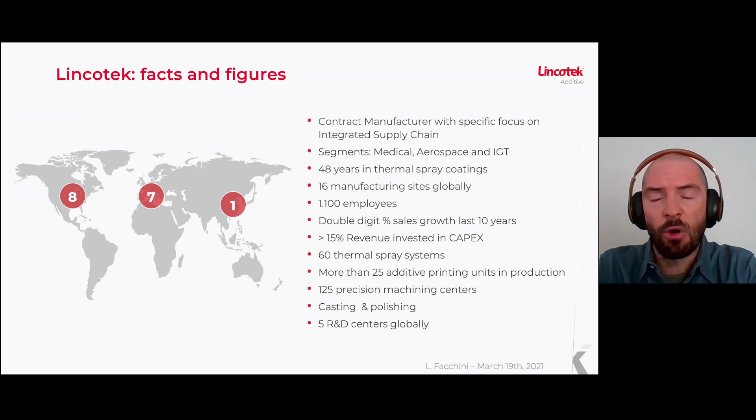Lincotek is a contract manufacturer focused on integrated supply chain. We started with thermal spray coatings about 50 years ago in Italy. Today we have more than 1,100 employees and 16 manufacturing sites globally. Now, in addition to thermal spray, we offer design, casting and polishing, machining, and additive manufacturing.

Lincotek Group operates in medical, aerospace, and IGT segments. We produce and commercialize our own plasma spray equipment as well. And in the last 15 years, we gained extensive experience in additive manufacturing.

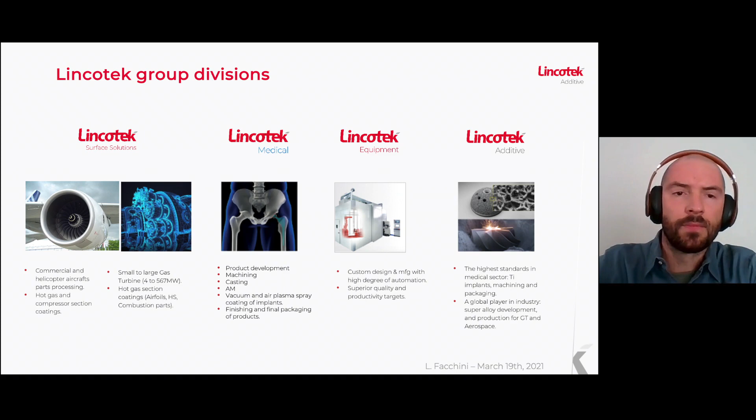In fact, we invested a lot in research and development, and we still invest. We have engineers working on it and also working on validations and co-design. And we are able to handle different materials used in medical applications, such as titanium 6-4 and cobalt chrome.

Just this month, we have helped the OEMs with 2 products through the FDA. These involve product level validations to generate data and reports to satisfy FDA requirements as laid out in guidance documents for AM. At the same time, we know very well what serial production is and how to manage it.

Today, we have 25 AM machines globally, making in excess of 110,000 implants per year, 70% of which is for large joints. To give you an idea of the scale of our AM operation, we consumed in excess of 14 tons of titanium powder for AM.

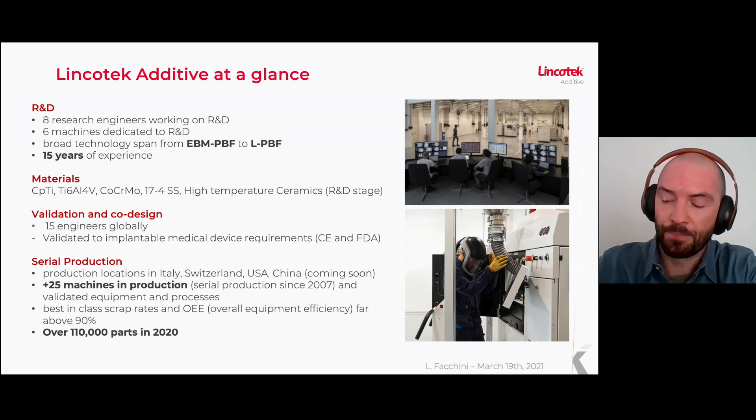In approaching additive manufacturing production, you have to keep in mind that it's not just about technology, since the process itself is just a piece of a manufacturing route.

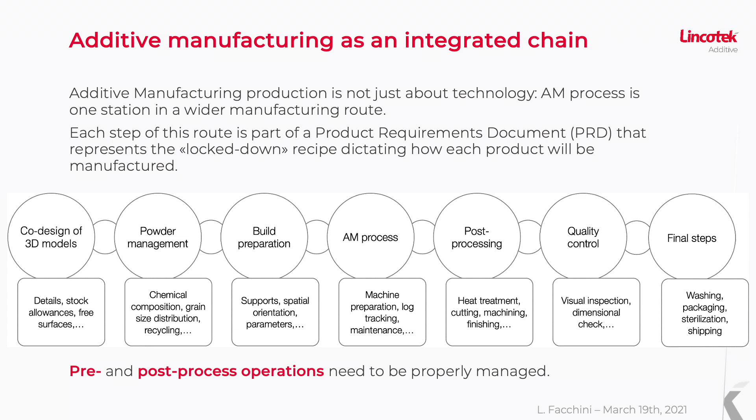Co-design, powder management, and build preparation are basic pre-process operations, and they are as essential as post-process operations like heat treatment or machining. And of course, parts cannot leave the plant if they didn't pass quality controls, and if they are not properly packed. It can seem trivial, but it's not.

Supply chain of AM is perhaps more complicated than that which deals with raw materials. Most facilities accept raw materials based on chain of custody, but with AM, it's mandatory to source from dependable suppliers who respect ASTM standards and are dedicated to quality.

In addition, at least at Lincotek, no powder batch is allowed to go on the shop floor unless AM parts made using that batch satisfy ASTM standard requirements. In the next slides, I will explain how we AM engineers manage the supply chain aspect of AM from an engineering perspective, ensuring quality and reliability.

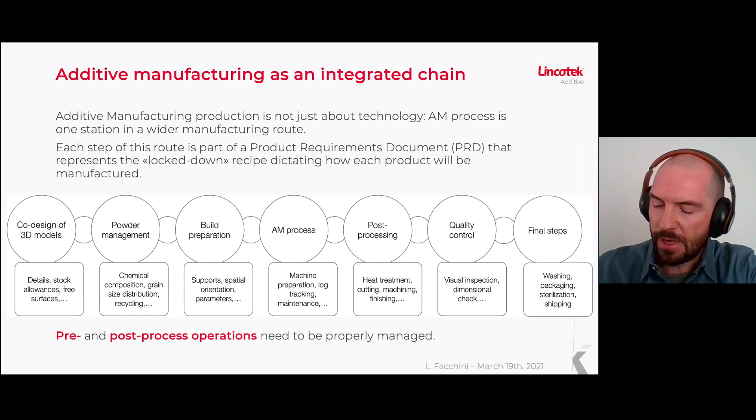Creating net-shape lattice structure is for sure one of the best features of additive manufacturing. In 2017, FDA stated that about 68% of AM devices has a complex porous structure.

About this, in Lincotek, we deal with different 3D CAD files and dedicated software, and we have our own device master file. This is especially useful for US customers.

Anyway, AM has strong points as well as limitations, as any other production technology. And the experience, in this case, plays a basic role in managing the limitations and exalting the strong points.

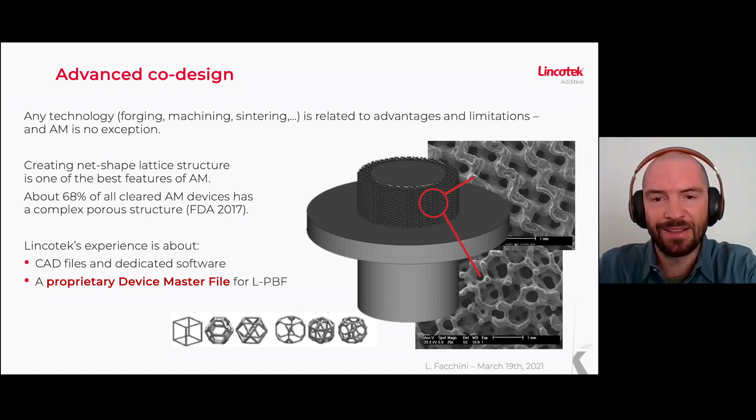We know that design shall take into account several details and aspects. For instance, it's important to clearly know which surface will be finished or tooled and which not, and the spatial orientation of the parts, as well as the placing of supports, will be related to these aspects. As an example, here I have represented a possible 3D geometry.

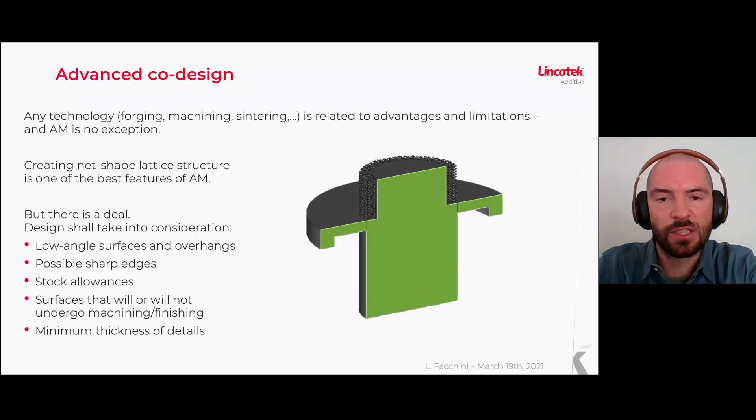Such geometry has many illustrative attributes. For instance, sharp edges can be critical as points of stress intensification and crack nucleation. And generally, in powder bed fusion, low-angle surfaces are not self-supporting, so extra supports are needed.

The minimum obtainable size is related to the beam melting pool, so there's a limitation to the minimum reachable thickness of thin geometries. But there are many other examples. For instance, the orientation and the size of through holes are crucial, since both support removal and powder evacuation can be hard to do, and so on.

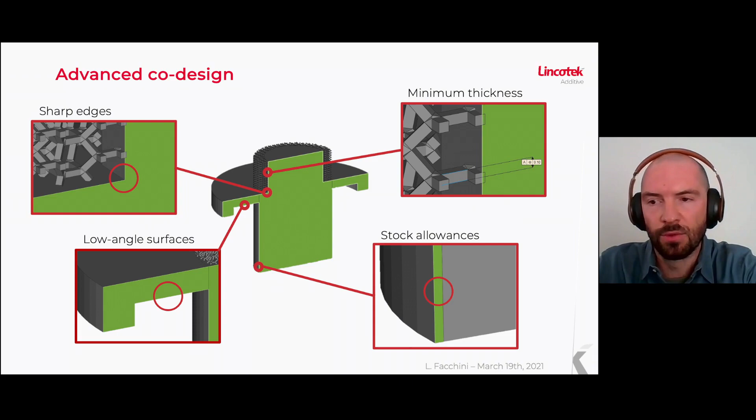I am making these points to illustrate the scrutiny we put the customer's CAD files through. Our ultimate goal is to get this part through notified bodies, and this analysis helps ensure that these parts will meet performance criteria and have a stronger chance of approval for clinical use.

Of course, the raw material is a determinant for the success of the build and also for the properties of the final part. The grain size distribution of the powder, its morphology, and its chemical composition are some of the features that need to be optimized.

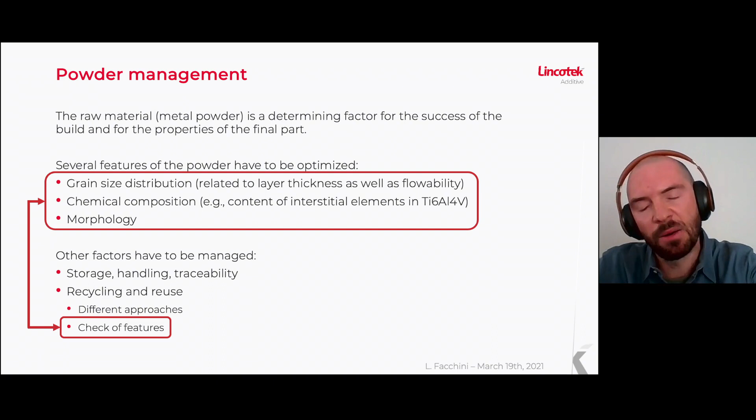But many other procedures, such as powder storage and handling and its recycling, have to be properly managed. For example, our master file discusses the change in mechanical properties as the number of reuses increases.

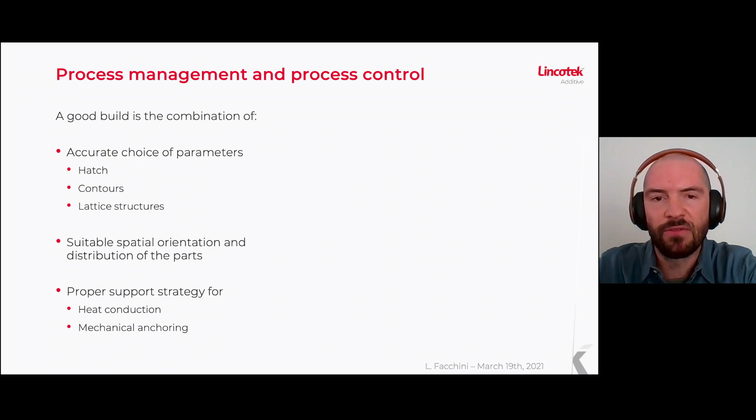Well, a good build is the combination of different aspects. First of all, any item calls for a specific parameter set. So the beam power, the scan speed, the scan path, the focusing of the beam will change if you're melting a solid block instead of a lattice structure.

And these parameters will be different at the core of the part and on the contours.

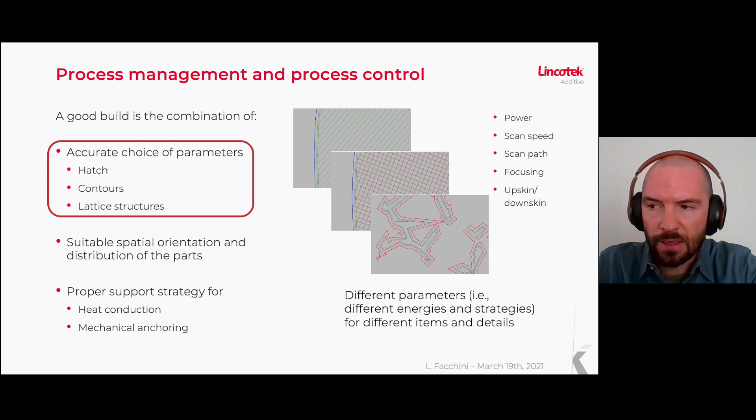The spatial orientation of the parts and their distribution on the building plate can affect the thermal history of the build and the mechanical solicitation of the parts during the process. And this will impact the final surface quality, the residual stresses, and the dimensional consistency.

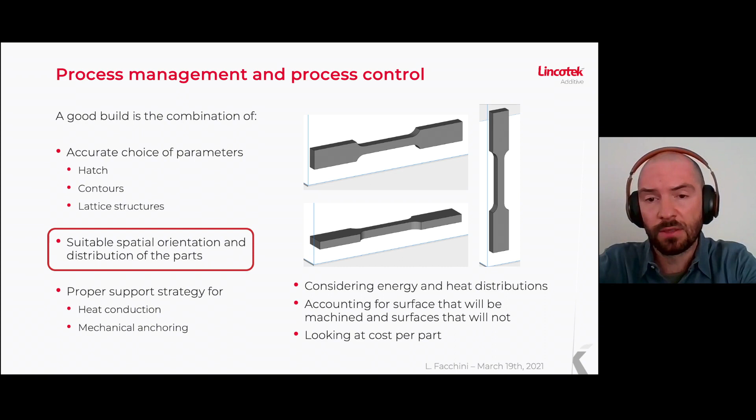The orientation of the part also affects the need for supports. Since supports help in mechanical anchoring and in heat conduction, but at the same time, their application is strictly related to the orientation of the part, and of course, their use will also determine the surface quality and roughness of the as-built part.

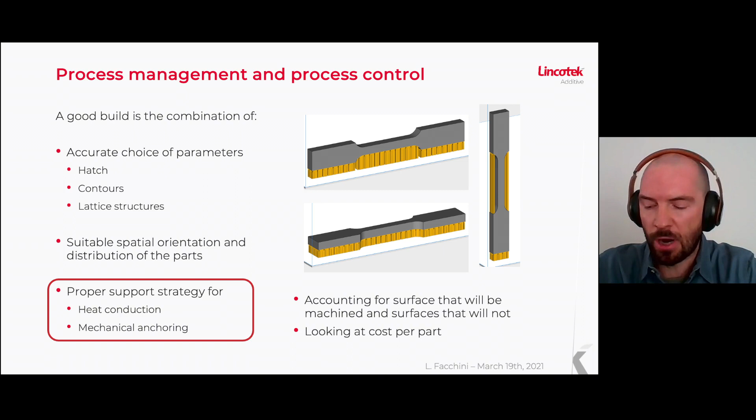Even if the supplier and the model are the same, each machine is different from the others. So each machine can produce statistically equivalent parts, but only if process parameters and offsets are properly adjusted. This requires a lot of expertise and, of course, a lot of work on tuning.

Our master file talks about equivalence of the output of our machines. This huge work we have done over many years gives comfort to OEMs that at least at Lincotek, they are getting an equivalent supply chain regardless of which machine is being used.

And just to clarify, we are not saying that each supplier and each technology are equivalent. They aren't. That's wrong. We are saying that we maintain our production line where these machines become equivalent in output.

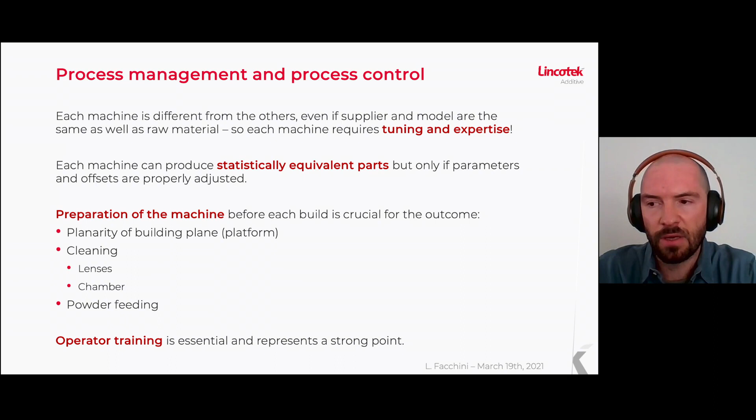It must be said that also the preparation of the machine before each build is critical for the process. Among other things, the planarity of the building plane, the cleaning, and good powder feeding are crucial for the outcome, and so operator training is essential.

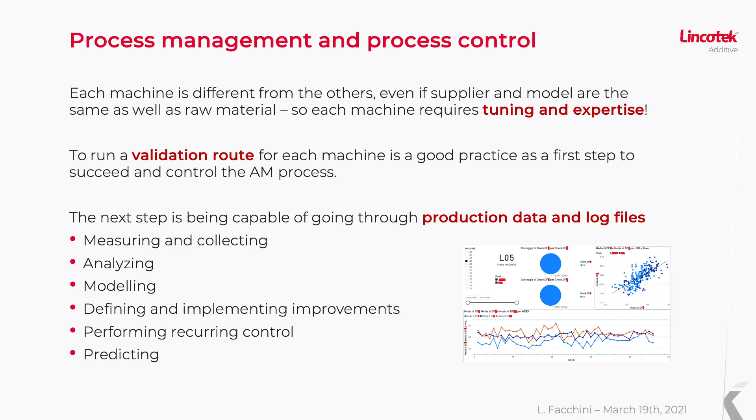Well, let's talk about validation. Validation is a first step to control and dominate the AM process. But the next step is represented by the study of production data and log files that have to be collected and analyzed for modeling, implementing improvements, for performing controls, and also for predicting events. So big data helps us in running our process.

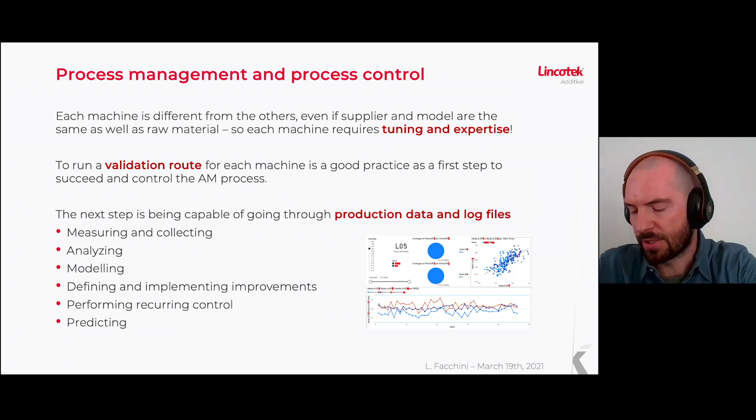Talking about validation, today FDA and international standards organizations provide recommendations for carrying out validations, and we deal with this. Validation of our processes goes through some steps. During the IQ, the installation of the process equipment is checked. Then during OQ, it shall verify the equipment operations and demonstrate the effectiveness of the process.

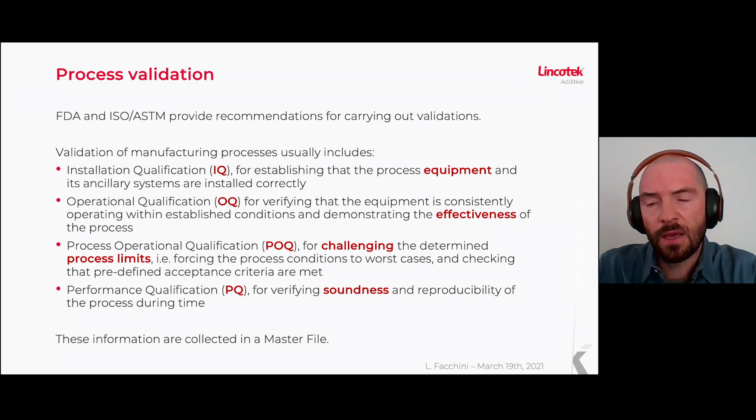POQ is carried out to challenge the determined process limits. Then finally, PQ shall verify the soundness and the reproducibility of the process. And all this information is collected into a master file.

Lincotek adopts a two-level approach. At the process level, we verify the effectiveness of the process itself, the compliance with the standard requirements, and so on. Access to this proprietary information is possibly authorized on the basis of agreements with the OEM. The second level is a device level in which the operational qualification and the performance qualification are drafted by Lincotek and reviewed by the OEM and directly pertain to the product. This is very common with our US-based customers, and this approach has helped us in addressing FDA questions.

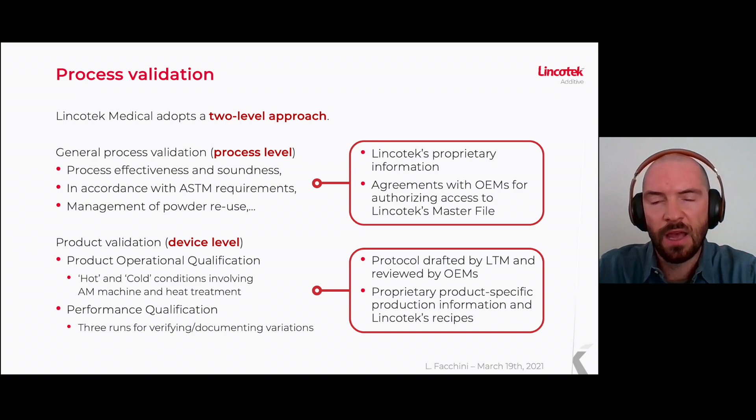Jumping back to the chain, post-processing is as important as pre-process operations. Heat treatment is usually performed for stabilizing the microstructure and removing the residual stress, and it's critical for the final properties of the material. It works fine for this, but at the same time can lower the yield strength of the material, and this has to be dealt with.

Many parameters and features have to be defined and managed, such as temperature and soaking time, the vacuum level for high vacuum treatments, the pressure in case of hot isostatic pressing. The message is heating technology is complex and tricky and requires careful preventive maintenance and a lot of expertise.

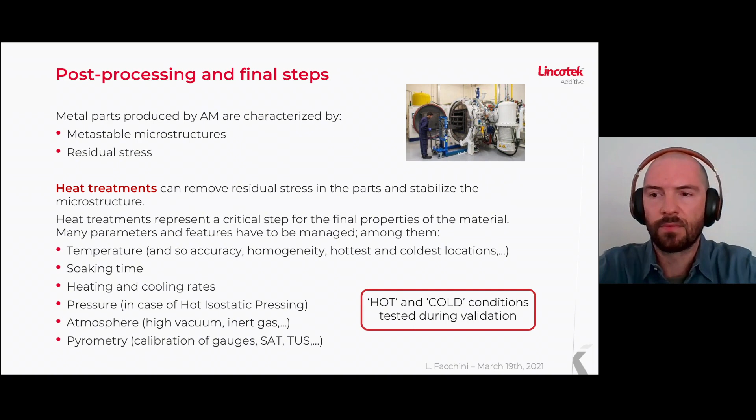Since the parts are welded to the building platform after the process, they have to be detached. EDM wire cutting or band saw can be used depending on the need of precision instead of speed. However, when possible, an accurate design of supports can make the detachment possible even without cutting.

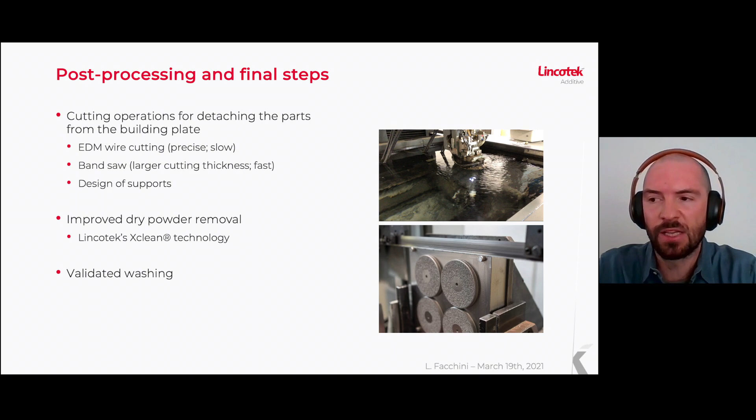Then after cutting, the parts are ready for going through Xclean, that's the Lincotek's validated process developed to clean from the residual metallic powder in completely dry conditions.

Here we have illustrated some tibial and femoral components of knee prosthesis produced by additive manufacturing and then tooled and polished. Actually, Lincotek offers the combination of these operations in Europe as well as in the US. Expertise in additive manufacturing together with skills in machining result in an improved mindful design.

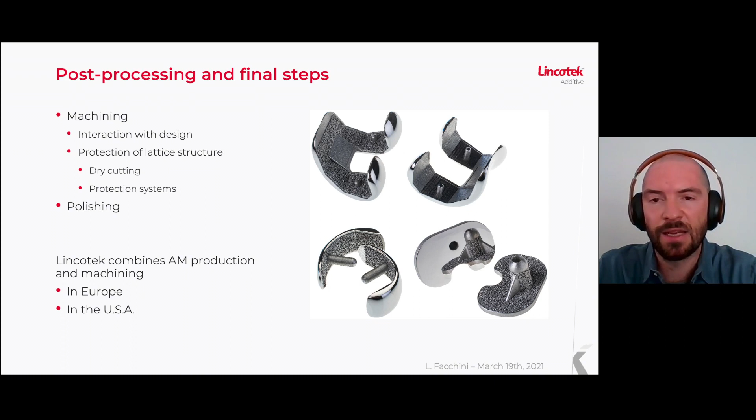Moreover, since we are aware of the importance of keeping AM lattice structure clean and free of contaminants, we gained experience in dry cutting of titanium 6-4 and cobalt chrome, and we also studied specific systems for protecting and shielding the net from lubricant.

Our operators are trained and skilled for manual finishing. This impacts on several further operations depending on surface quality, such as laser marking.

We already talked about the continuous control of the process by managing big data. Final controls, such as visual inspections, dimensional checks, and mechanical testing on coupons, feed this collection of data, as well as they determine the quality of our parts.

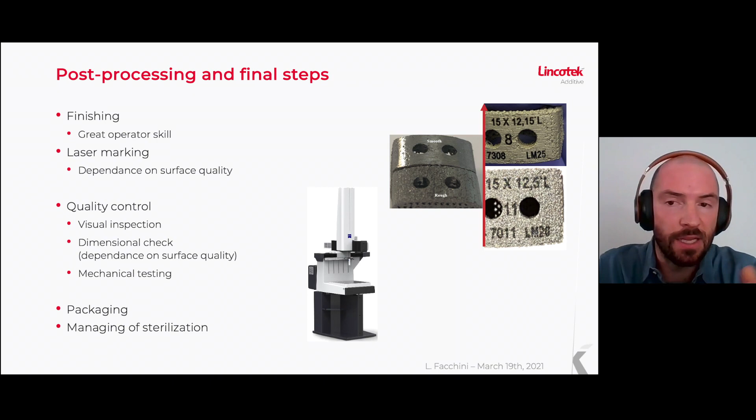After the quality assurance says yes, parts are ready for packaging, sterilization if required, and then for shipping.

So in conclusion, we have seen that additive manufacturing production is not just about technology. AM can print complex 3D shapes, but there are some limitations, and co-design becomes crucial for overcoming them. From this point of view, skills in both AM and machining take design to another level.

Additive manufacturing processes, as well as post-process operations like heat treatment, are technologically advanced and can be tricky. So ability in design for builds, preparation of machines, and the managing of this post-processing are essential. We see that big data can help in process control and improvements too. But overall, I can say in few words that expertise, skills, and training are the keys for succeeding at each step of the chain.